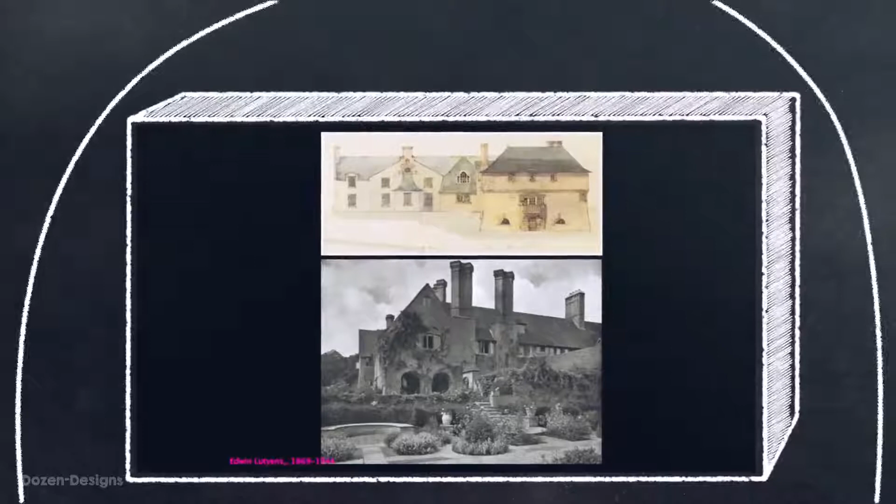Well, we have similar problems in buildings. In the past, before air conditioning, we had thick walls. The thick walls are great for insulation—they keep the interior very cool during the summertime and warm during the wintertime. The small windows were also very good because they limited the amount of temperature transfer between the interior and exterior.

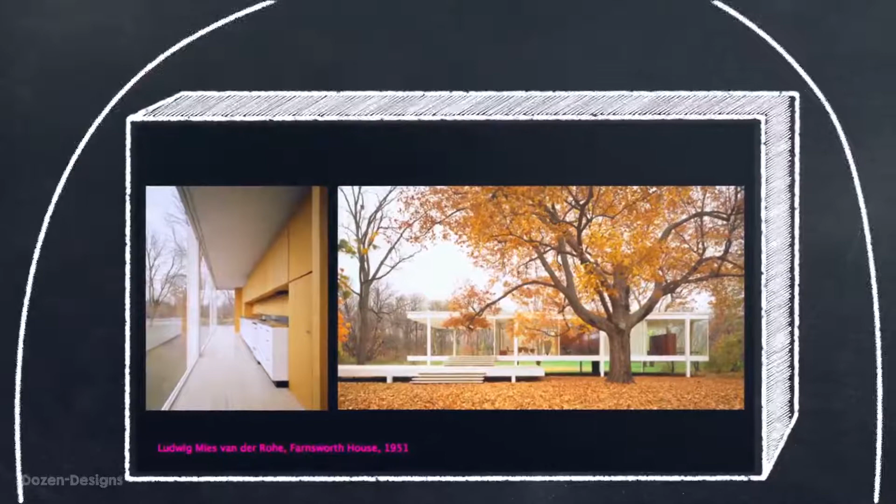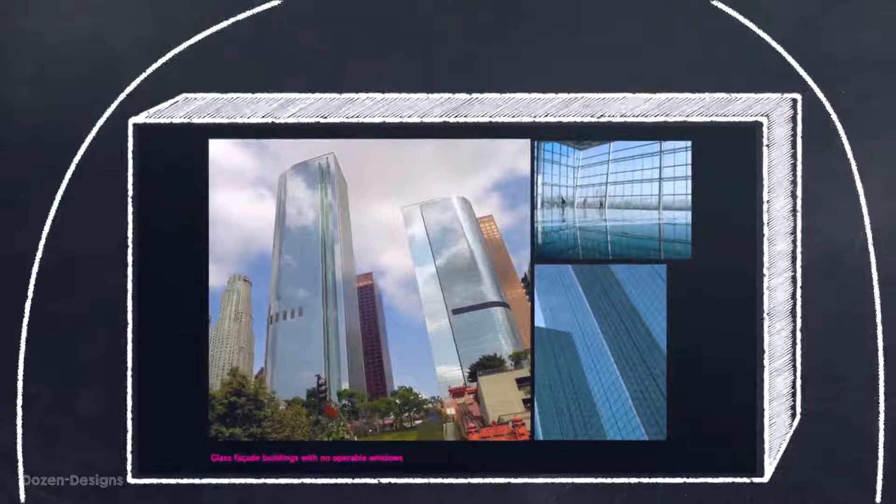Then in about the 1950s, with the advent of plate glass, rolled steel, and mass production, we were able to make floor-to-ceiling windows and unobstructed views, and with that came the irreversible reliance on mechanical air conditioning to cool our solar-heated spaces. Over time, the buildings got taller and bigger, our engineering even better, so the mechanical systems became massive. They require a huge amount of energy.

They give off a lot of heat into the atmosphere, and some of you may understand the heat island effect in cities, where urban areas are much warmer than the adjacent rural areas. We also have problems when we lose power—we can't open a window. So buildings become uninhabitable and have to remain vacant until the air conditioning system can start up again.

Even worse, with our intention of trying to make buildings move towards a net zero energy state, we can't do it just by making mechanical systems more and more efficient. We need to look for something else, and we've gotten ourselves a little bit into a rut. So what do we do here? How do we pull ourselves and dig us out of this hole that we've dug?

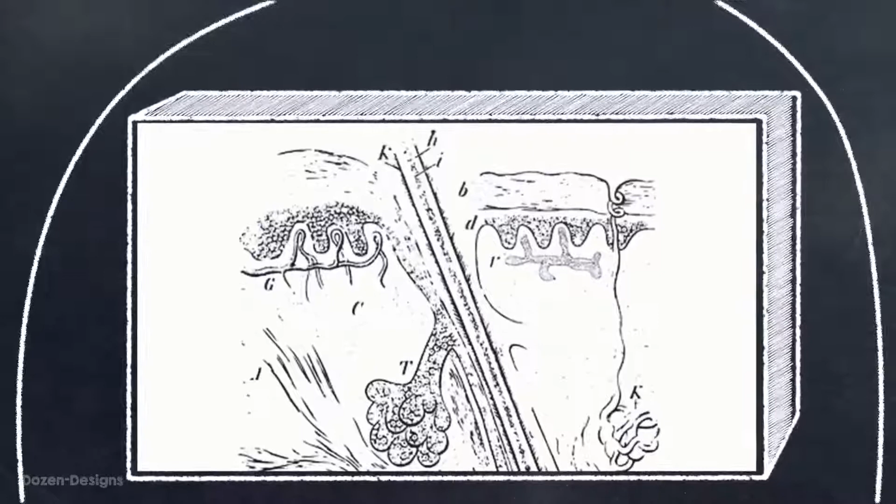If we look at biology—and many of you probably don't know, I was a biology major before I went into architecture—the human skin is the organ that naturally regulates the temperature in the body. It's a fantastic thing, the first line of defense for the body. It has pores, sweat glands, all these things that work together very dynamically and very efficiently.

So what I propose is that our building skins should be more similar to human skin. By doing so, they can be much more dynamic, responsive, and differentiated depending on where they are. And this gets me back to my research.

What I propose first doing is looking at a different material palette to do that. I currently work with smart materials and a smart thermal bimetal. We call it smart because it requires no controls and no energy, and that's a very big deal for architecture.

It's a lamination of two different metals together. You can see that here by the different reflection on the side. Because it has two different coefficients of expansion, when heated, one side will expand faster than the other, resulting in a curling action.

So in early prototypes, I built these surfaces to try to see how the curl would react to temperature and possibly allow air to ventilate through the system. In other prototypes, I did surfaces where the multiplicity of having these strips together can create bigger movement when also heated. I currently have this installation at the Materials and Applications Gallery in Silver Lake, close by, and it's there till August if you want to see it.

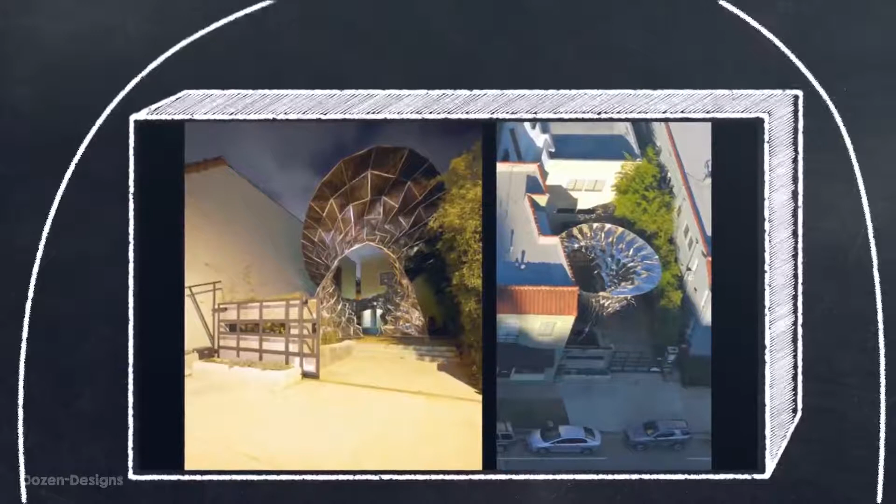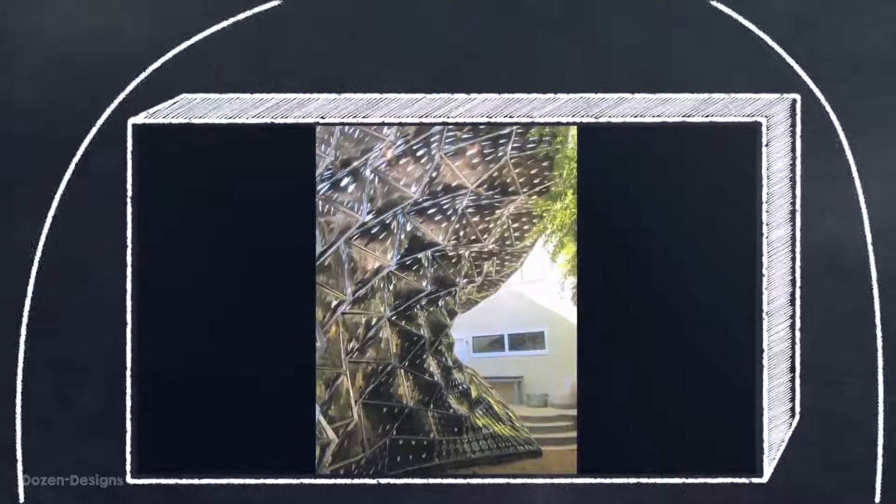It's called Bloom, and the surface is made completely out of thermal bimetal. Its intention is to make this canopy that does two things. One is it's a sun shading device so that when the sun hits the surface, it constricts the amount of sun passing through. And in other areas, it's a ventilating system so that hot trapped air underneath can actually move through and out when necessary.

You can see here in this time-lapse video that as the sun moves across the surface, as well as the shade, each of the tiles move individually. Keep in mind, with the digital technology we have today, this thing was made out of about 14,000 pieces, and no two pieces are alike at all—every single one is different. The great thing is that we can calibrate each one to be very specific to its location, to the angle of the sun, and also how it actually curls.

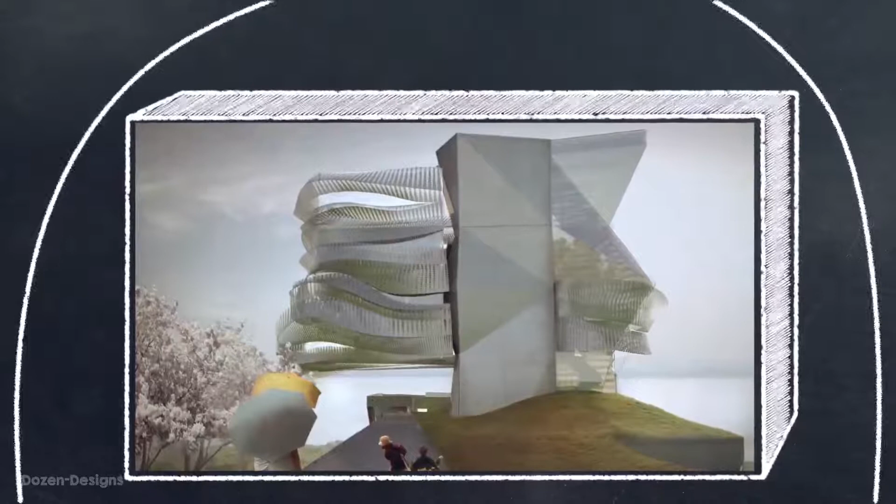This kind of proof of concept project has a lot of implications for future application in architecture. In this case, here you see a house for a developer in China—it's actually a 4-story glass box. It's still a glass box because we still want that visual access, but now it's sheathed with this thermal bimetal layer. It's a screen that goes around it, and that layer can actually open and close as the sun moves around on the surface. In addition, it can also screen areas for privacy, differentiating some of the public areas in the space during different times of day.

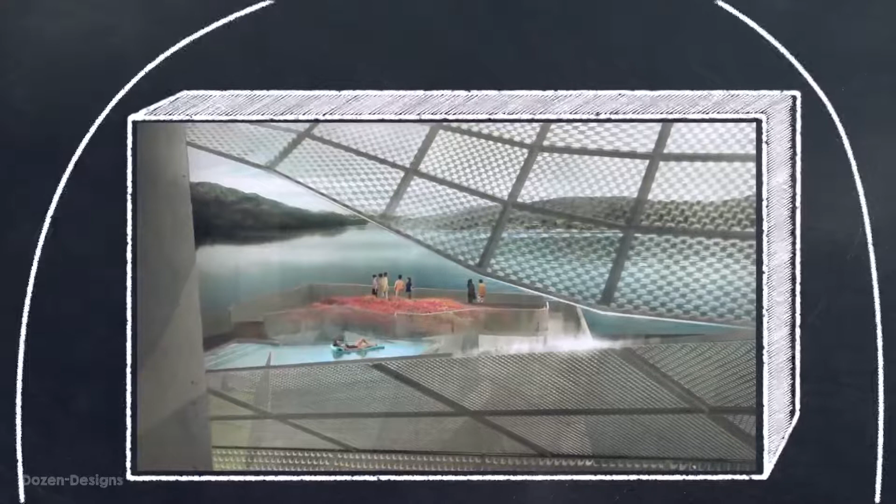What it basically implies is that in houses now, we don't need drapes or shutters or blinds anymore, because we can sheathe the building with these things, as well as control the amount of air conditioning you need inside that building.

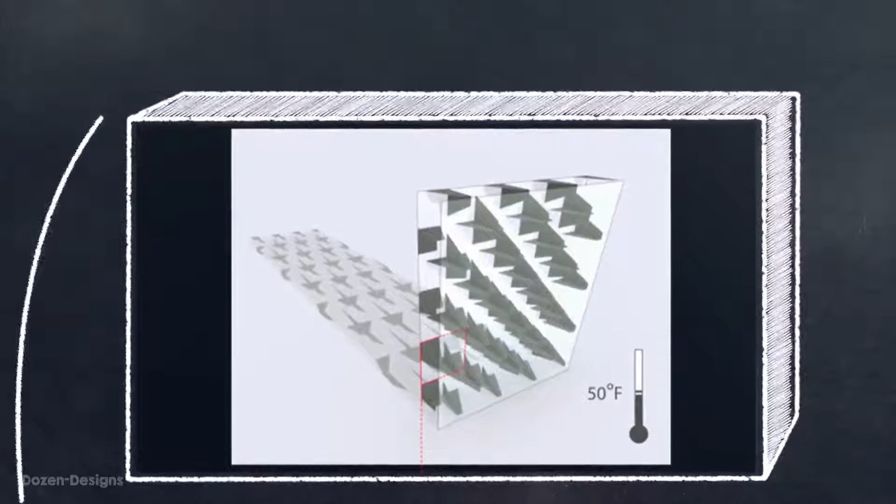I'm also looking at trying to develop some building components for the market. Here you see a pretty typical double glazed window panel. In that panel, between those two pieces of glass—that double glazing—I'm trying to work on making a thermal bimetal pattern system so that when the sun hits that outside layer and heats that interior cavity, the thermal bimetal will begin to curl.

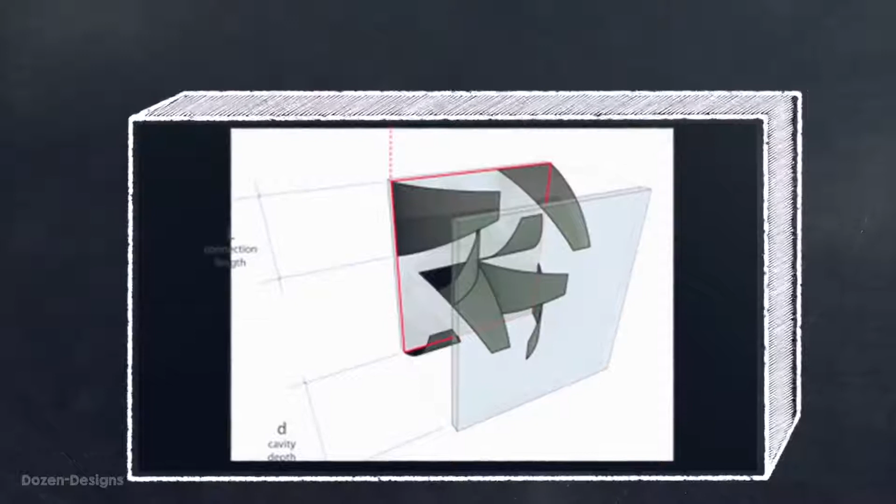What will actually happen is it'll start to block out the sun in certain areas of the building, totally if necessary. You can imagine even in this application that in a high-rise building, where the panel systems go from floor to floor up to 30, 40 floors, the entire surface could be differentiated at different times of day depending on how the sun moves across and hits that surface.

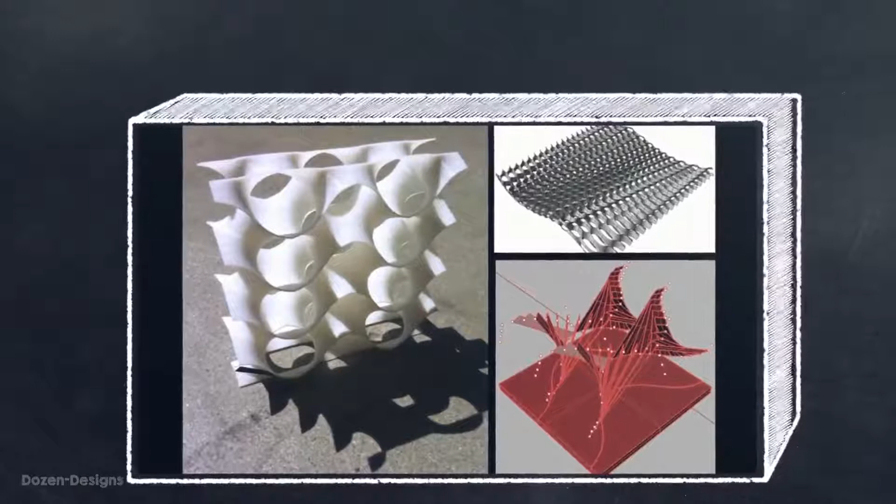These are some later studies we're working on right now that are on the boards, where you can see in the bottom right-hand corner with the red—it's actually smaller pieces of thermal bimetal, and we're trying to make it move like cilia or eyelashes.

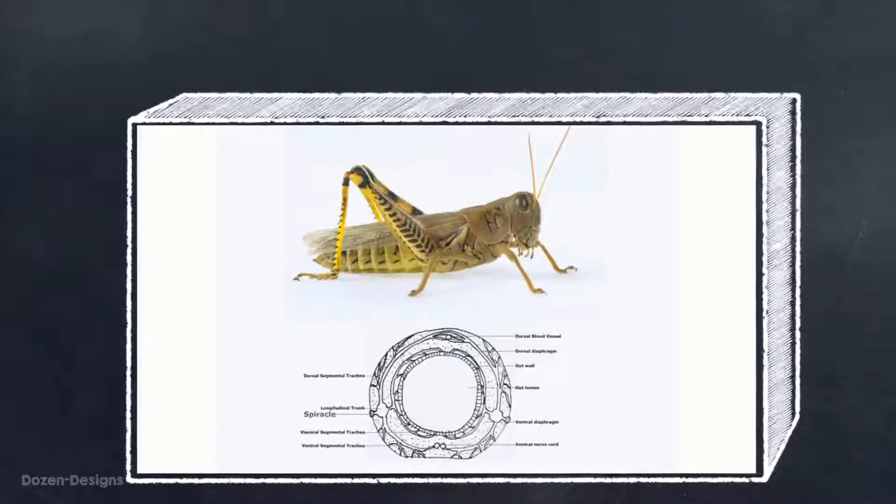This last project is also about components. It's the influence—and if you've noticed, one of my spheres of influence is biology—from the grasshopper. Grasshoppers have a different kind of breathing system: they breathe through holes in their sides called spiracles, and they bring air through that moves through their system to cool them down. In this project, I'm trying to look at how we can consider that in architecture too, how we can bring air through holes in the sides of a building.

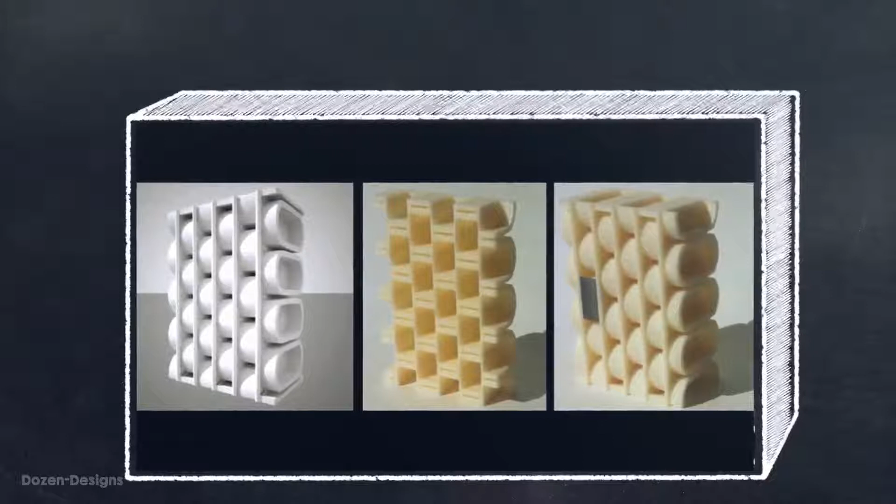And on the right, the thermal bimetal curls and allows that air to pass through. So those are two different components that I'm working on. And again, it's a completely different thing because you can imagine that air could potentially be coming through the walls instead of opening windows. So I want to leave you with one last impression about the project or this kind of work in using smart materials.

When you're tired of opening and closing those blinds day after day, when you're on vacation and there's no one there on the weekends to be turning off and on the controls, or when there's a power outage and you have no electricity to rely on, these thermal bimetals will still be working tirelessly, efficiently, and endlessly. Thank you.

My name is Doris Sung, and I founded Dosu Studio Architecture. Dosu is located in Rolling Hills, California. It's in a rural area south of Los Angeles.

Dosu is a research practice where we mainly work on projects that are not client-based. They're usually grant-funded. And we work with responsive materials, trying to look for making buildings move and change and respond. We try to find ways to make architecture less static and to be able to change and adapt to its environment. So a lot of times we have no idea what we're making or why we're making it, but we'll just make it because it's kind of just a cool idea.

And we'll develop it to a point where we start to then speculate on how we can apply it. The other method is tops down, where using some of our experiences, we can make a product for a targeted purpose. Thermal bimetal is a lamination of two alloys of metal, and the alloys of metal have different coefficients of expansion.

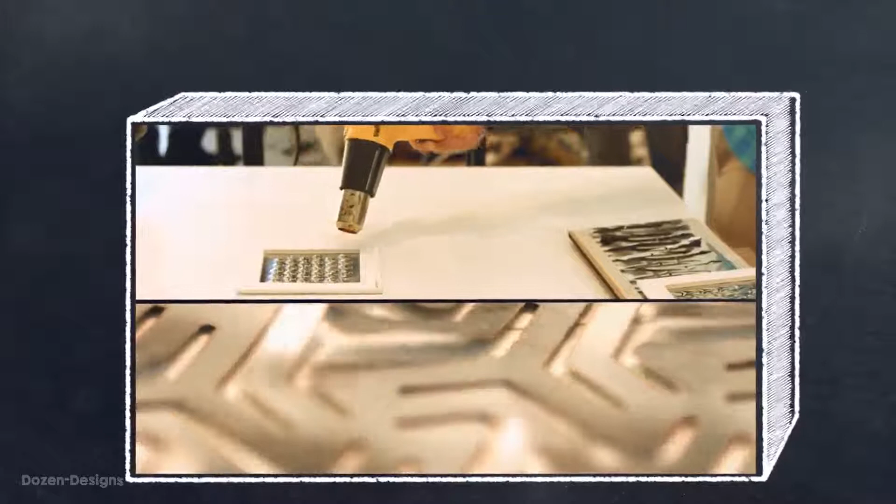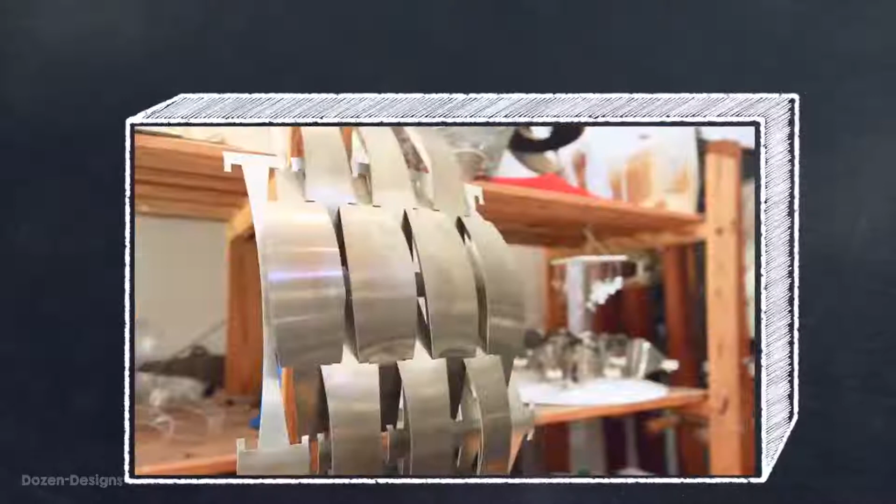So on one side it expands more than the other when heated, and on the other side it's less. So the result when heated is it curls. We can use that curl to respond to the environment, to release heat, to shade, to strengthen, to do many different things. So as a material that responds to temperature, it is very, very useful in architecture.

We have a lot of design challenges. Besides the basic of anything is that we can use a lot more money, time, and a lot of help. There aren't the computational tools out there available that would really make our job easier, so sometimes we actually have to design the computational tool.

I think most architectural projects don't allow you the luxury of working bottoms up all the time. And because that's the process that we use a lot, we come up with new ideas and new ways of using the bimetal that each time we actually never even anticipated.

Researchers at MIT, Harvard University, and Seoul National University have engineered a soft, autonomous robot that can crawl across surfaces by squeezing segments of its body like an earthworm. The robot, made almost entirely of soft materials, is named Meshworm for the flexible, mesh-like tube that makes up its body. Mechanical engineer Sang-bae Kim and his colleagues looked to nature, and specifically the earthworm, for design inspiration.

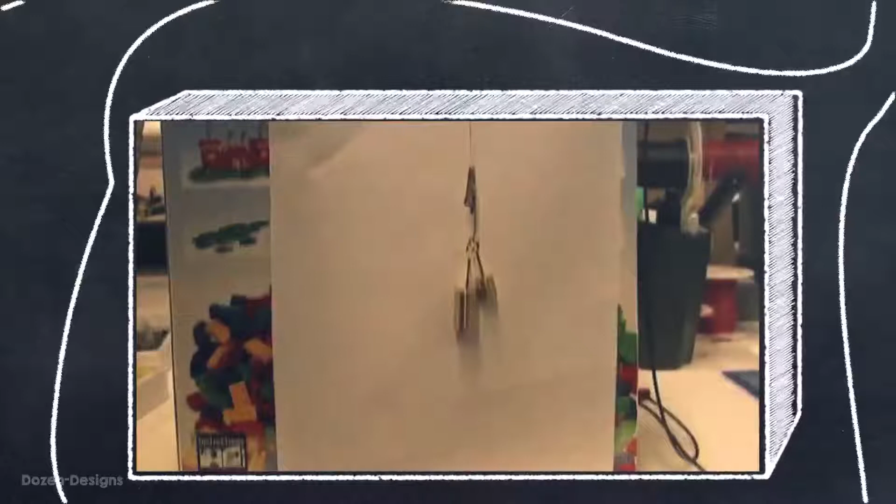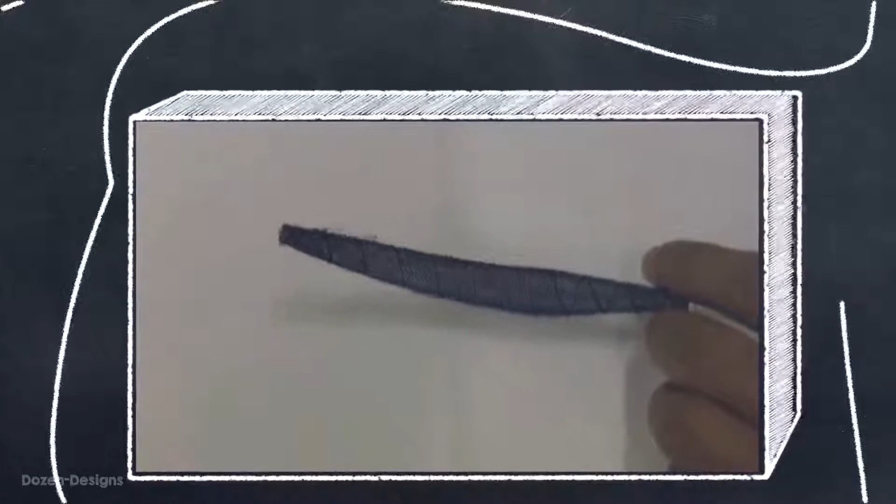They noted that the ground dweller is made up of two main muscle groups that work together to inch the worm along. Researchers created artificial muscle from wire made of nickel and titanium, a shape memory alloy that stretches and contracts with heat. They wound the wire around the tube, creating segments like that in an earthworm. They then applied a small current to the wire segments, causing the wire to contract and squeeze the mesh tube, propelling the robot forward. As an ultimate test, the group subjected the robot to multiple blows with a hammer, even stepping on the robot to check its durability.

The robot proved remarkably resilient, surviving the attacks and crawling away intact. Kim says such a soft robot may be useful for navigating rough terrain or fitting through tight spaces. The meshworm design may also be useful for next-generation endoscopes, implants, and prosthetics.